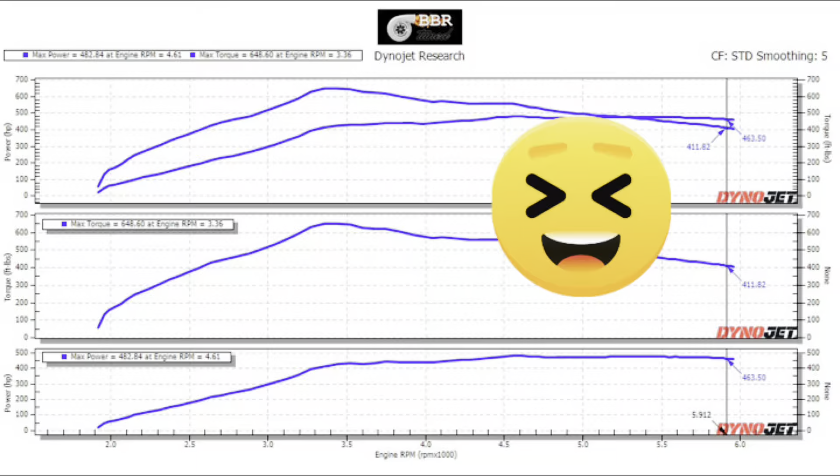Here's our test subject for today. This is my daughter's 2020 Lariat F-150 Ecoboost. Crew cab, short box, with a lovely little soft topper on it. Full weight, nothing out of it, has everything in it.

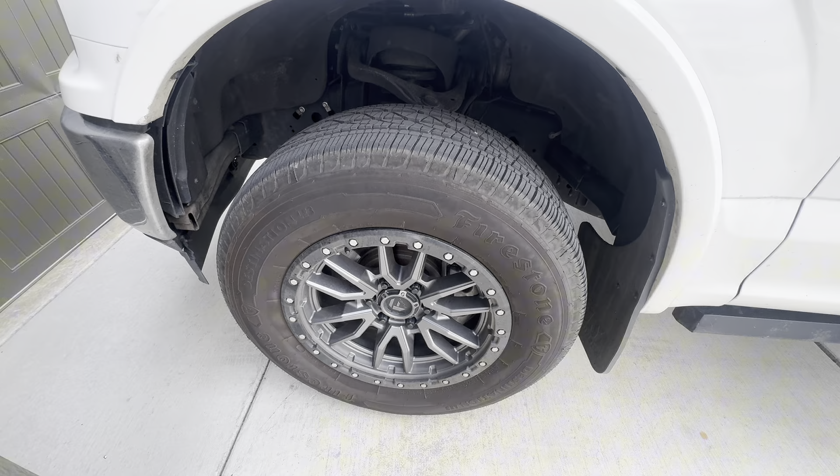It's got fuel fake bead locks with some lovely Firestone Destinations straight off of what they sent us when we bought it. So absolutely nothing done to this thing other than the fact that I have a Cobb Access Port and I have tuned this vehicle. Full weight, everything's here.

This is what we're going to do our testing off of, just to show you what we can do with the Ecoboost out here. I can do this with HP Tuners as well, but I was trying to get some stuff in on Cobb as well.

This one is done on Cobb right now because it's one of the years you can do that on. You can do it on most of the Raptor years and the 2020 and earlier. After you get to 21, if it's not a Raptor, we have to use HP Tuners instead. I do like the Cobb interface a little better for logging and doing remote tuning, but HP will work. We just have to get through some of the glitchiness of their software when you're using your phone to log stuff and send it over to me.

So we'll show you what this thing did. We'll make a couple 1/8 mile rips, both in stock form and with the 92 octane tune. We were running 92, and I'm not doing an ethanol comparison here today - I'm going to change it over to like an E40 later. You can't run full E85 in these with the stock fuel system; there are some upgrades you have to do to it. But again, the point of this was just to show you what a tune is capable of doing to these trucks, and it's pretty huge.

All right, we're going to get a little 1/8 mile hit here on the tuned version. 30... 60... 1/8 mile. There's a baseline for the 1/8.

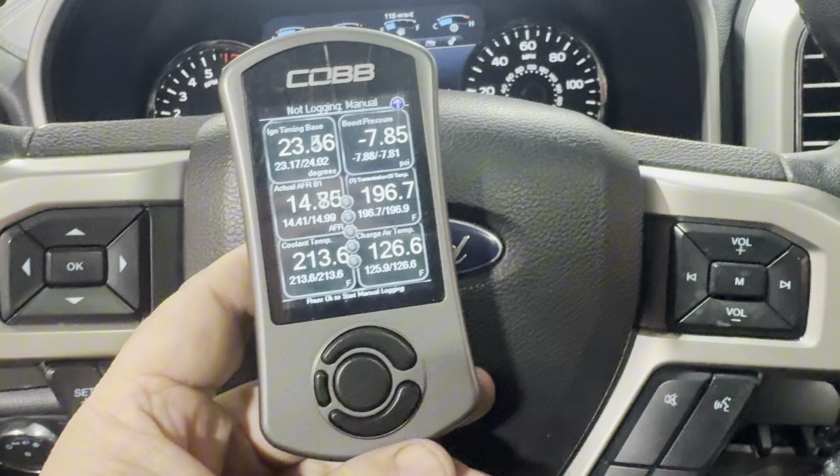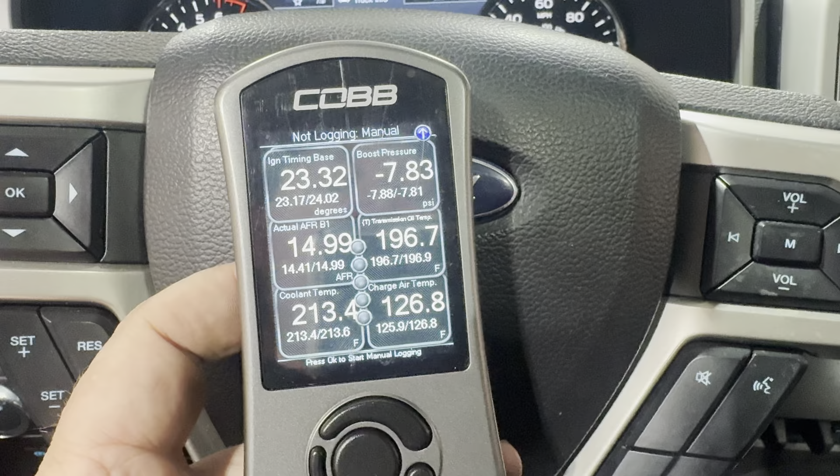All right, we have a bone stock 2020 F-150 that is my daughter's truck. It's Ecoboost 3.5. This is my tune that's on it right now. We're going to run a pull with it on the dyno and see what we make. Then we're going to run the stock tune, and we're going to run a Cobb off-the-shelf 91 octane tune. Their 91 versus 93 really is close - it's like a degree of timing, and that's about it that I can tell on the difference between the files. So the 91 should be a pretty good comparison with us having 92 only here.

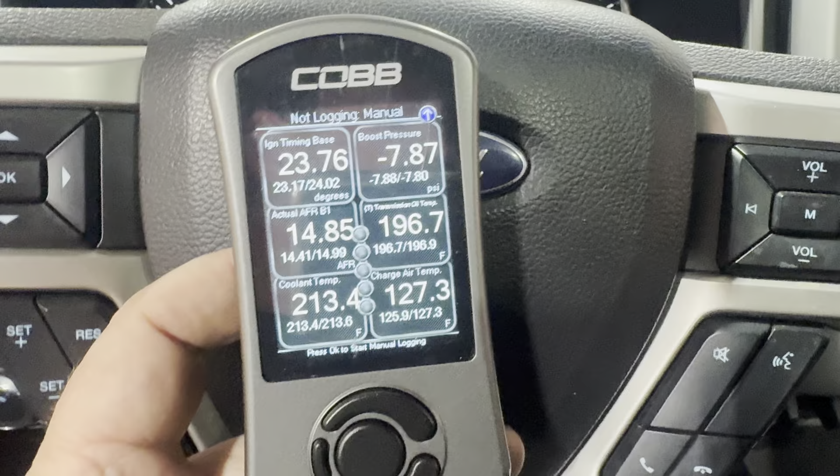So I'm going to finish getting this ready and we'll make a rip using Cobb. Again, already set the base map up - we're just going to log directly on this for right now. And then I'll go find my cord, and we're going to try to get an E40 tune on here as well and see what it does. All right, there we have my base map.

Made 420 wheel, 530, 529 foot-pounds of torque. Pretty smooth. It's got a little bit of jigger in the middle of it. It's kind of to be expected. It's a little warm right now.

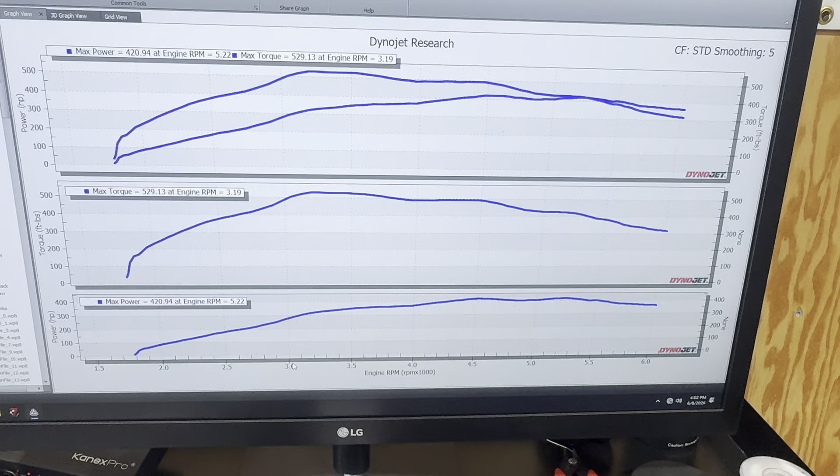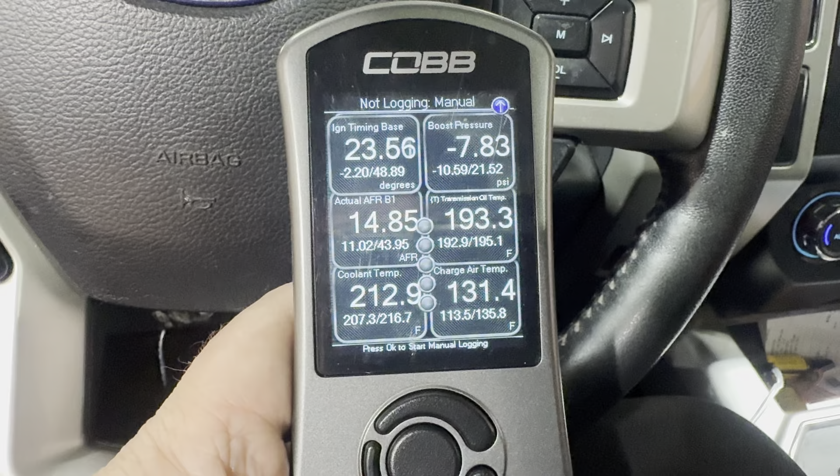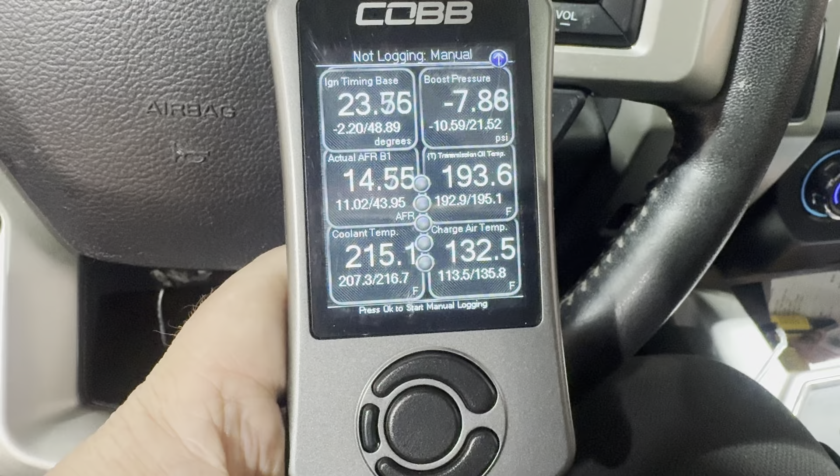So we'll go with that and see what our stock tune does, and 91 octane from Cobb. Just so you see where the numbers ended up at, we made 21.5 pounds of boost on the tune. We're going to leave it right there because that's about what it'll handle with the charge air temp being up as high as it is. You notice I still don't have an aftermarket intercooler on this. This is stock intercooler, so it does stay fairly warm, which is going to limit a lot of the stuff we can do. An intercooler is the biggest upgrade you can do on one of these trucks.

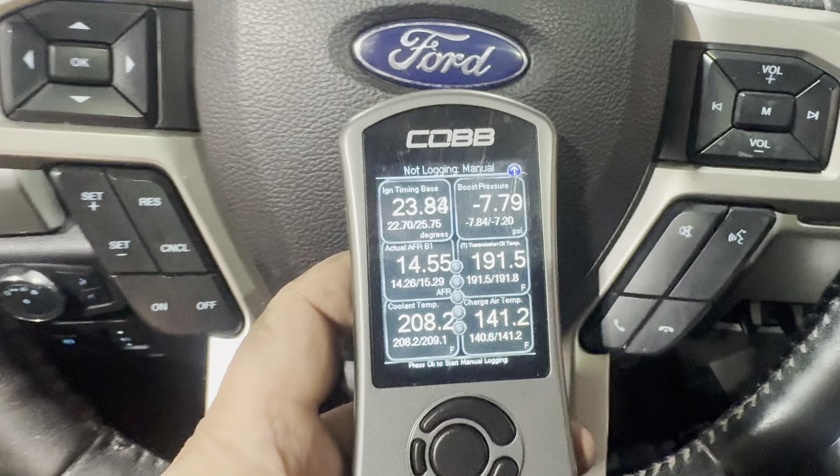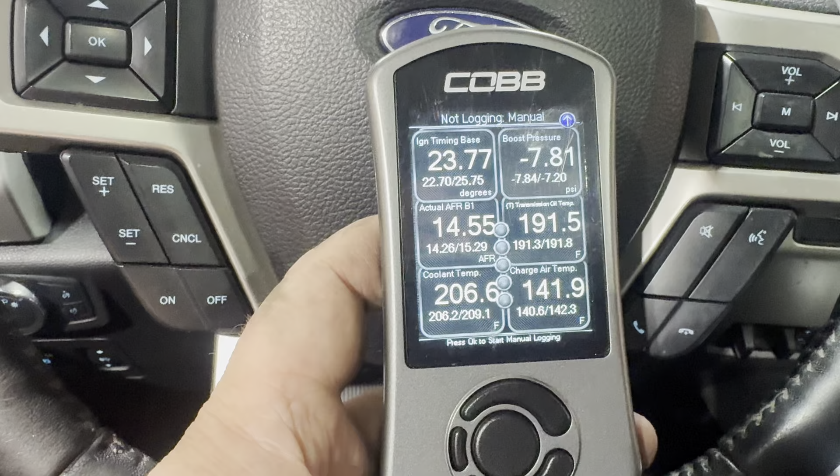All right, we got our tune baseline, trying to get this thing cooled down some. Got 2 fans up on the front now. We're rolled a little bit, see if that helps on the charge air temp. Then we'll go make a hit here with the stock tune. But right now the charge air temp's up far enough, it's going to pull the stuff no matter what. So one second, didn't realize it was going to get this warm here.

All right, we got charge air temp coming down. I think that's about where we were at on the previous one too, it was right around 130, 132. We're going to make the hit here in 5th on the stock tune. I'm not sure if it's going to pull this before the speed limiter or not, so we'll see here in 1 second.

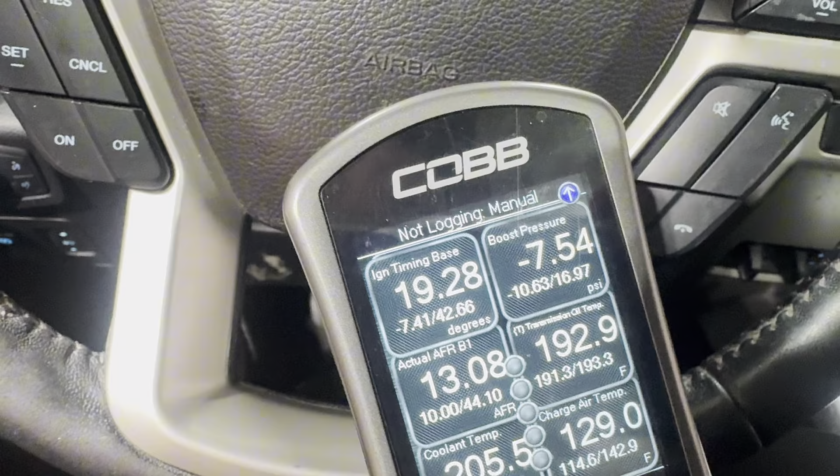As you can see, we did hit the speed limiter on the truck with the stock tune. Boost wise, we only made 17 pounds. Charge air temp was in the 120s during that pull, down to 114, so it's a little bit better. So we'll see what the numbers look like.

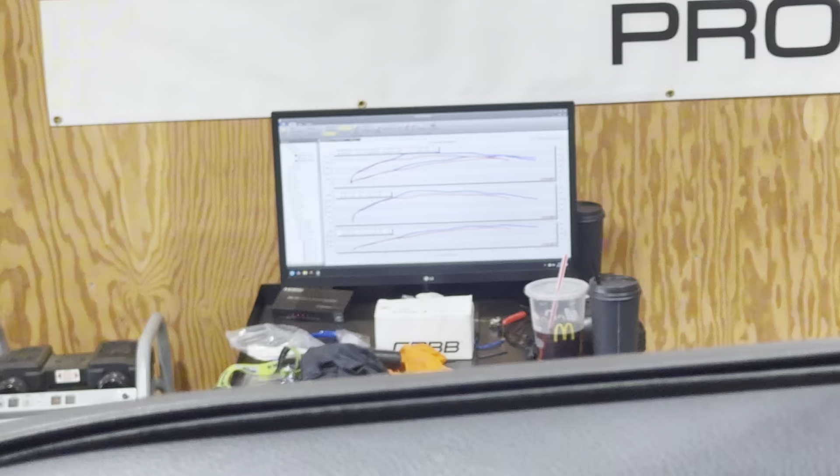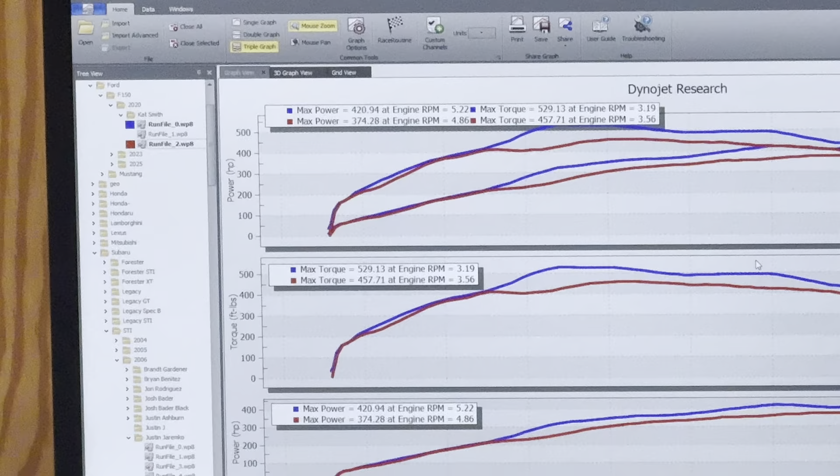You can already see we're down quite a bit. So stock looks to be 374 and 457. So we made almost 50 horsepower more. On my tune, torque was up quite a bit. So again, I think we're fighting a bit with the charge air temp, just with the setup in here. You can see...

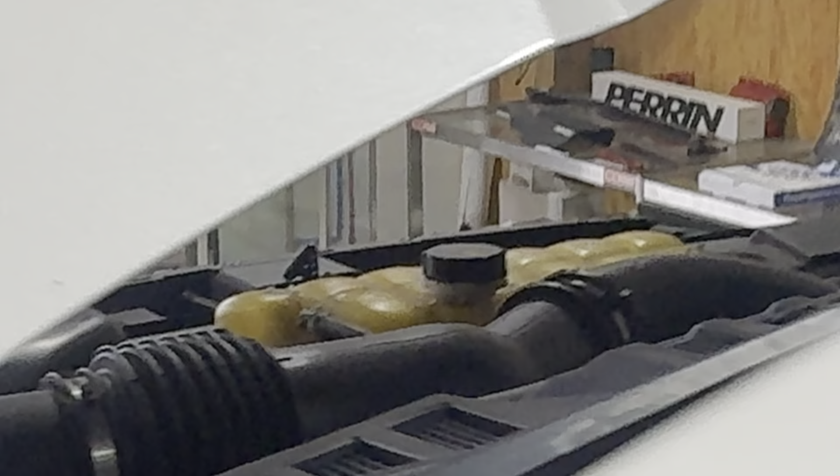It is like 80 degrees, and the stock intercooler does not like heat. So we're going to flash the 91 tune, see what the stock one from Cobb does on this, and we'll go from there.

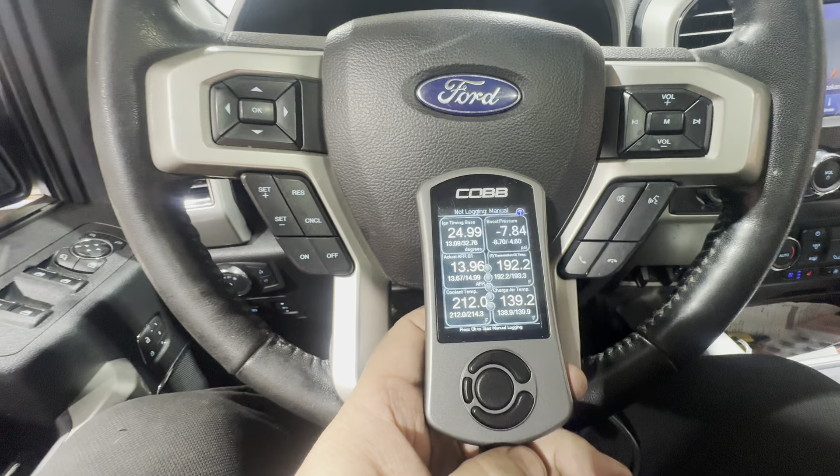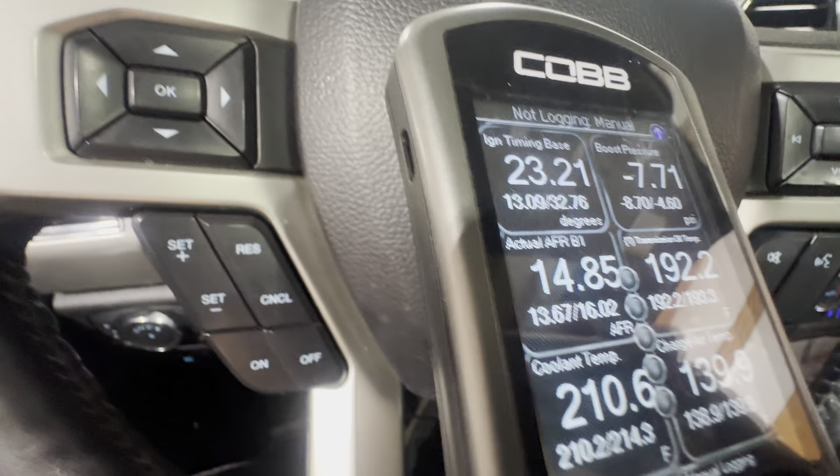All right, now we're going to do a 91 octane sport tune from Cobb and see what the numbers get. Again, our IATs are up a little bit, they cool down a bit once we start rolling. I did pull the ABS fuses to make this all work. Well, let's see what the stock one does now. Sorry, not stock, but 91 octane Cobb tune.

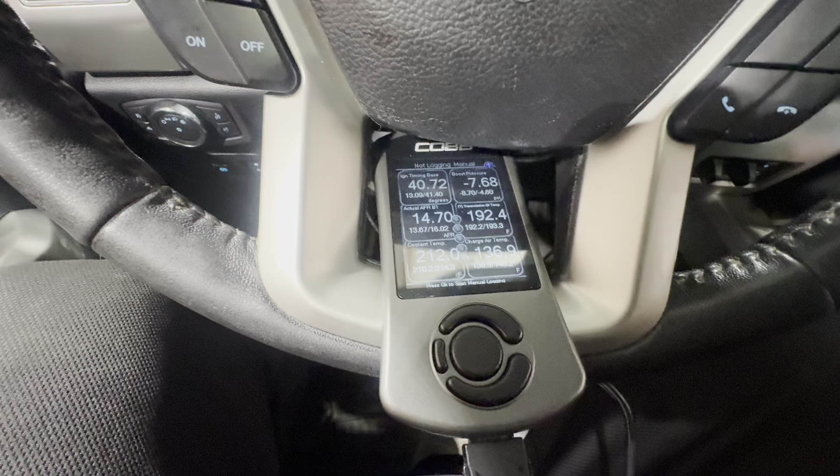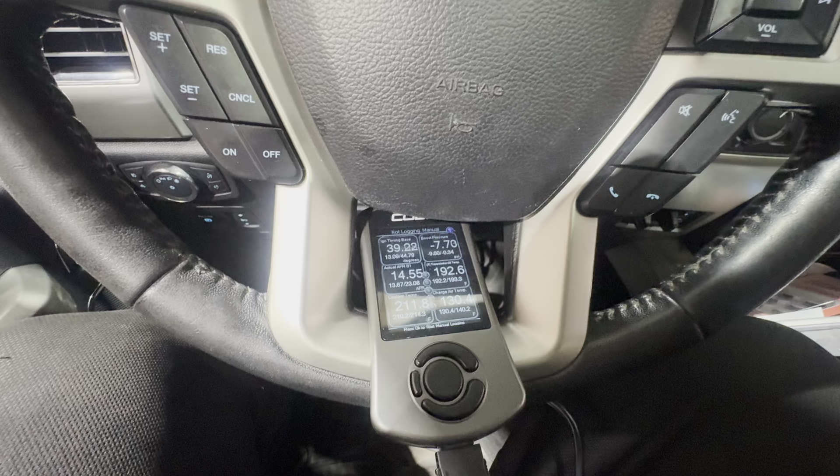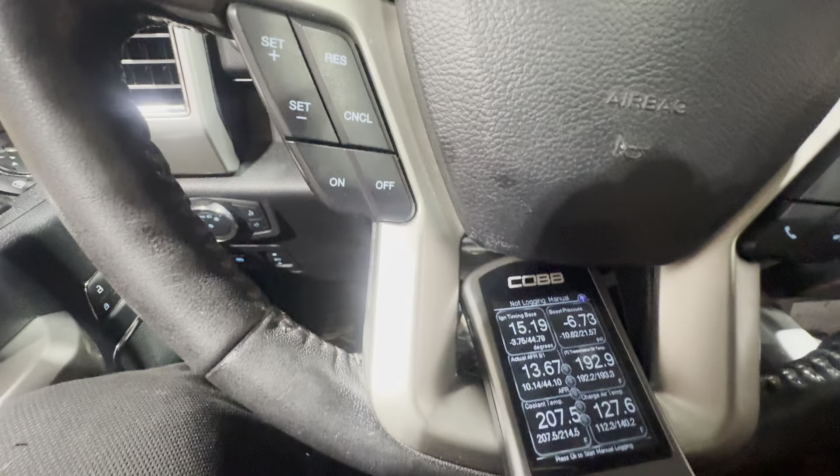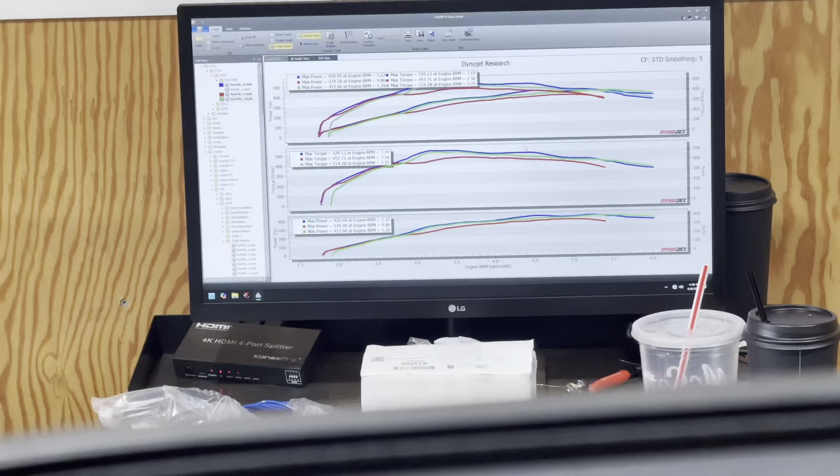And we're down to about where we were at, and everyone else starts at 2,000 RPM. So we saw 21.5 pounds of boost. Let's see what this looks like on the graph. Pretty identical to what I had, so I think I might have flashed the wrong tune. Actually, it wasn't wrong, I did put the right one on there. We are fighting a little bit of temperature stuff, but as you can see, it was at 412, 514. So my map did pick up some on here.

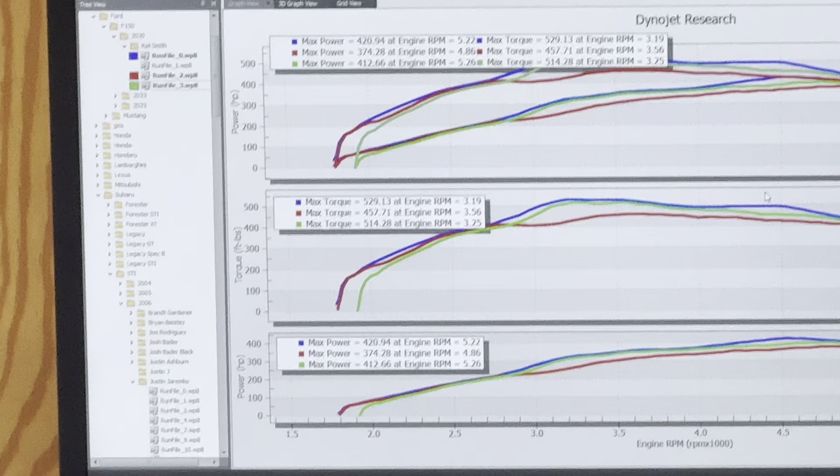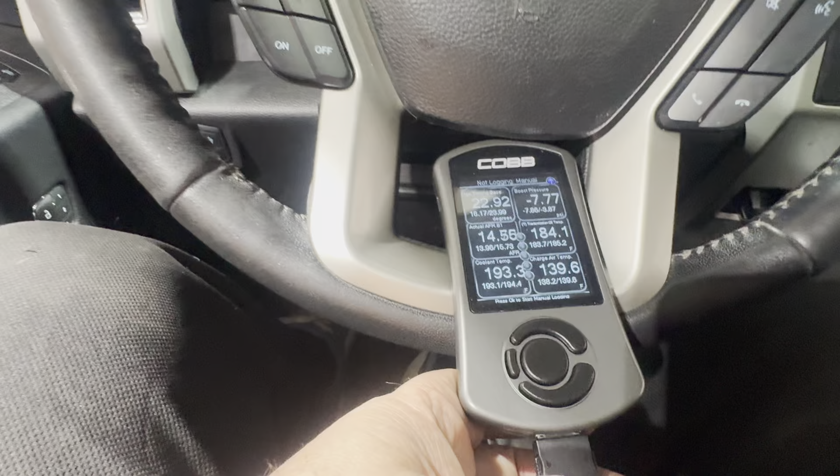We're going to try one more thing on here and see what it does, and we'll go from there. All right, made a couple of changes here. Again, just looking at this, showing you where we're at on numbers, coolant's in there good. Let's see what we get for boost pressure out of this one.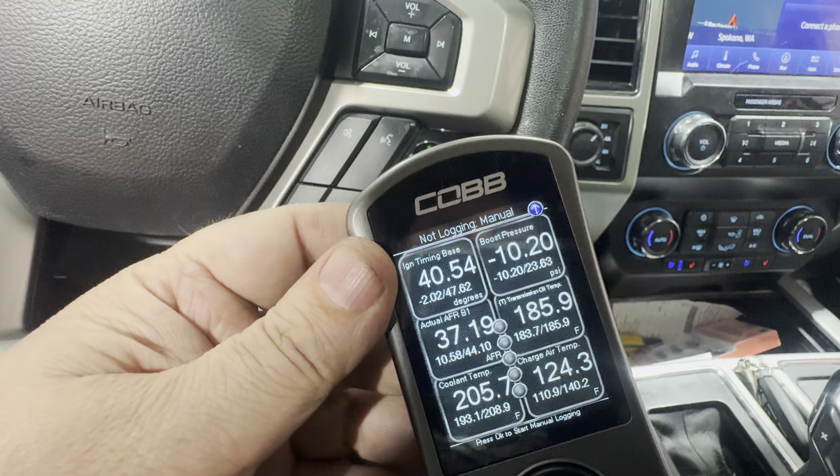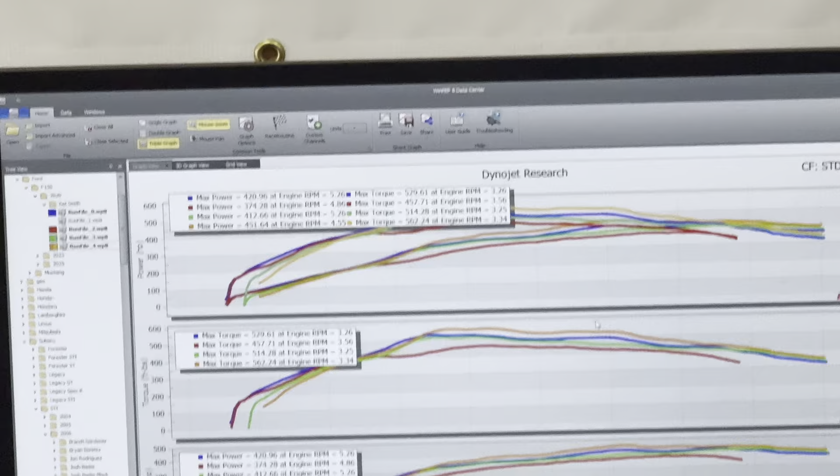There we go. I discovered I had a limit on my previous one. That brought us boost up to 23.63. And focus is there, that was a good jump. We're at 451 and 562. So that's what we can run on 92 octane here with properly tuned. So that was quite the jump. We'll check the logs that came through on that and go from there.

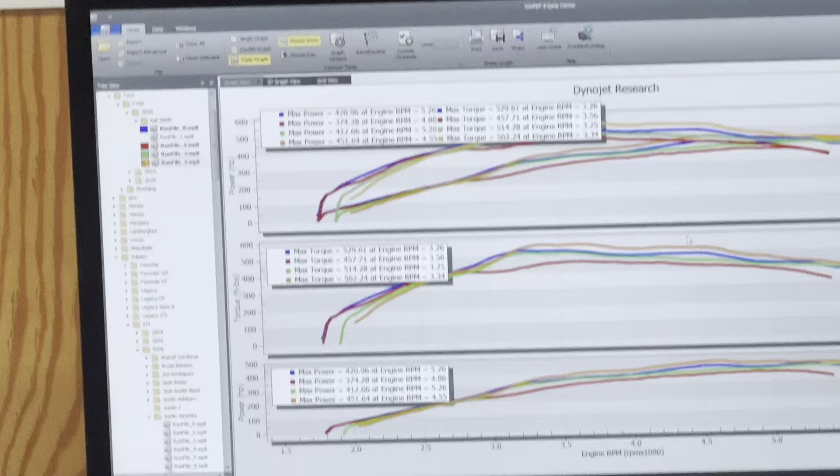All right, so hopefully you can hear me here. We got all the fans going, trying to keep everything cooled off. I discovered one of the limiters that I forgot to pull out.

So that was hitting us in the boost department. We were only making 21.5 pounds. The last hit brought it up 2 more pounds of boost to 23.5, which is the max we can run there. Timing looked pretty good across there. Had a little dip right here where I think it might have touched a little bit of the knock control up top, but nothing too significant. Kind of came across there nice and smooth.

So if I close all and just do the last one, this gives you a good aspect of what I'm able to get out of these. So this is 451 and 562, and the stock run was this file right here. So that gives you what stock versus tuned looks like. Significant increases here, right? We're 120 some odd foot-pounds of torque up, another 80 horsepower carrying through here.

All right, that's 365 versus 450. Sorry, it's kind of being weird on how it's displaying that. Sometimes Dynojet's got entertaining software. But just so you can see, stock in 5th gear, you hit the speed limiter. It's also starting to tail off pretty good past 5,200 RPM. Here we've got it carrying a lot harder. So we're up here making almost 400 wheel all the way out to 6,000 RPM now.

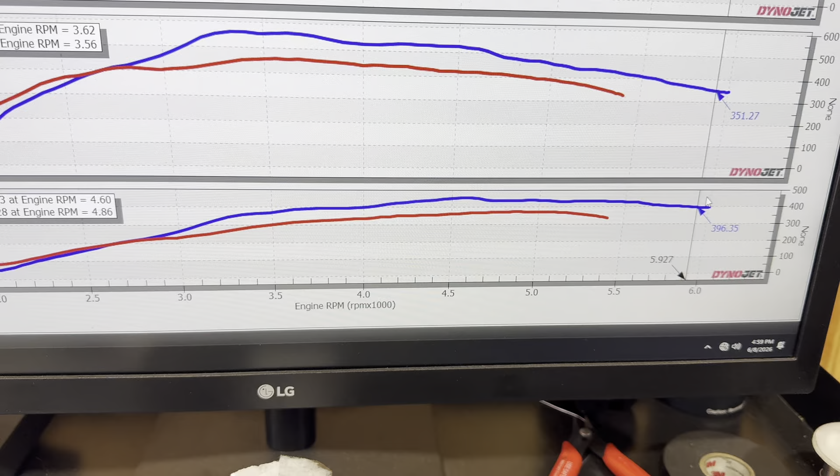Okay, so we've now mixed an E40 concoction. We're gonna run that, see what we get.

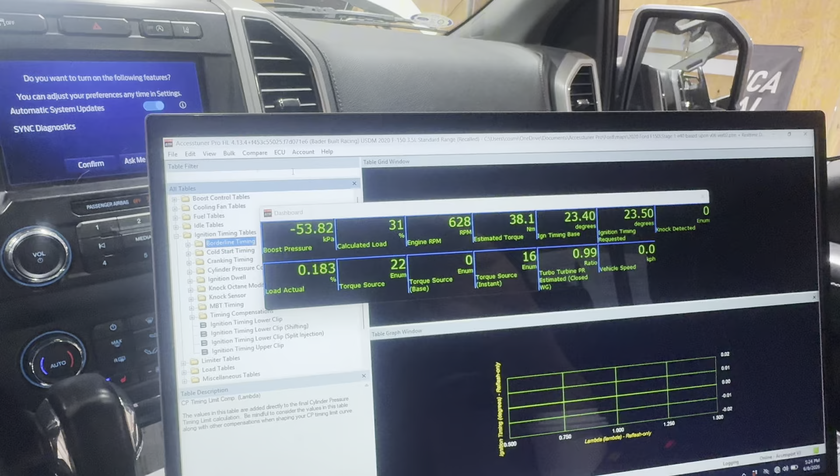All right, take 2. We got logging going on here. Sorry, I had a little problem with getting the Accessport, had to restart it real quick. We're here in our Accesstuner. We'll go ahead and make a rip now and see what this does on E40. Not enough hands to do all of this. So you can see, we got to relight the dash on because I got ABS stuff turned off, and we're rolling.

So we got it in 5th gear. Here we go, we hit the test.

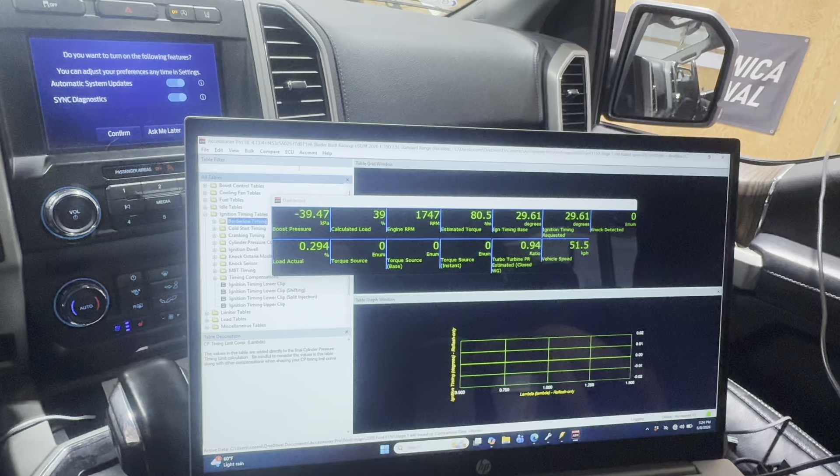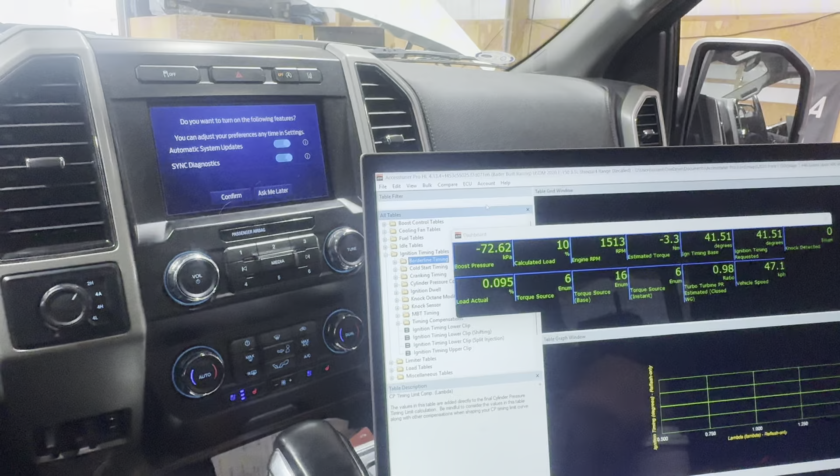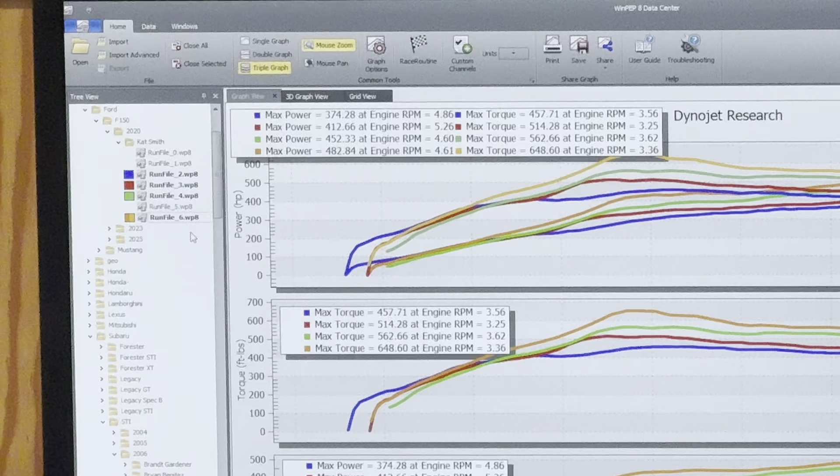That sounded pretty good, I think we got it. I'm going to stop my logging. And we'll hit the green button. That looks like we came up. We'll get a focus here in one second. Yep, there we go, 482. Big torque jump to 648. We'll take a look at it on the timing and everything else, but it definitely came up. Another 30 wheel and a whole lot of torque, which I probably should take a look to make sure we don't have any knock going on here.

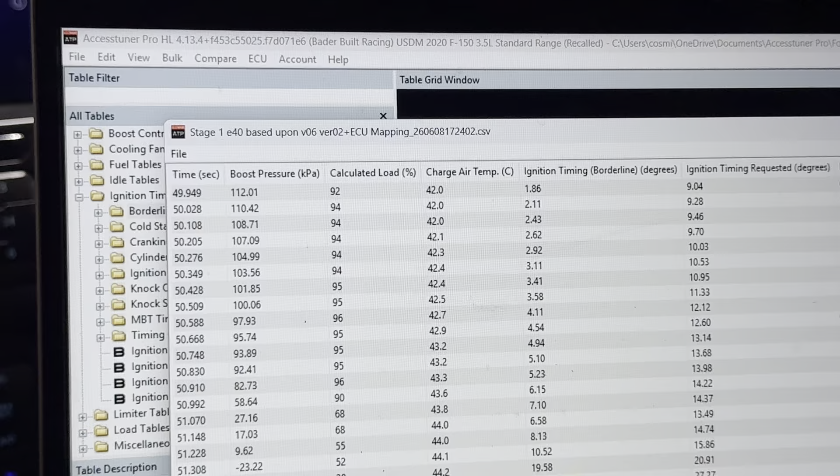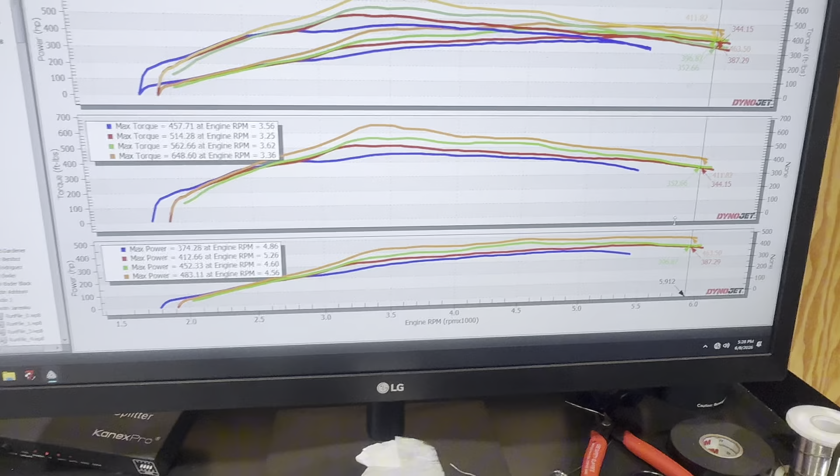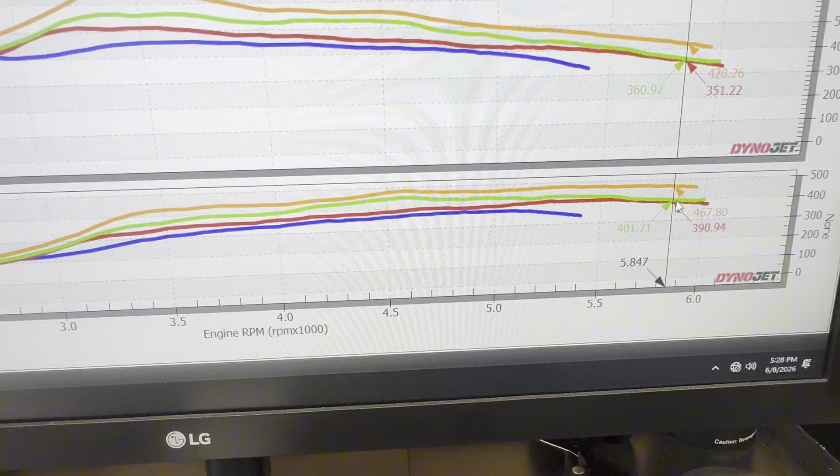We were down in the negatives, so I think we were okay, and it slowly came up. We got like 10.5 degrees out the back there, so that was pretty impressive. So that's E40. Ethanol fuel makes a huge difference. You can see here, if we focus down here on this end, I'm carrying 467 horsepower, whereas before in the green, which was my 92 octane, it was at 401. So we're carrying almost 70 wheel out the back end now. So this thing should be an absolute monster on the street.

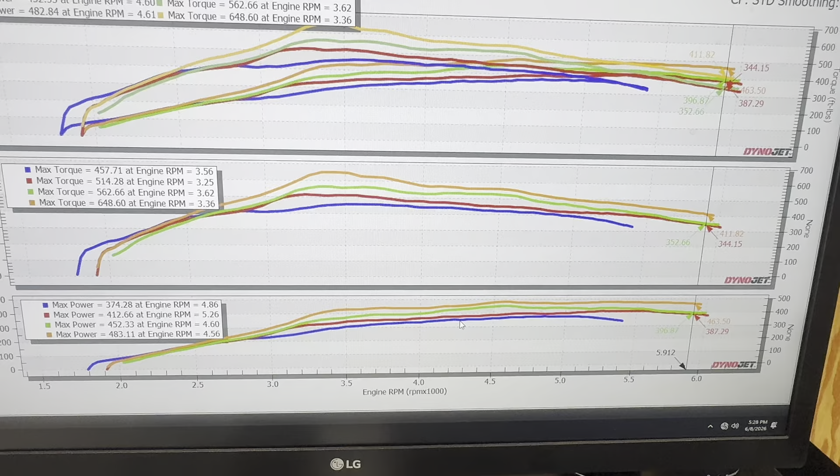I'm looking at the logs. We're not knocking, it's not having an issue with this. Knock control is not interfering. The knock sensors are working perfectly on the pump gas ones. You can see where it's been pulling it in and out on some of those. We went up to E40 and it's a huge jump in your max torque. This thing should be a ripper. We're going to go make a hit with the Dragy and see what it does.

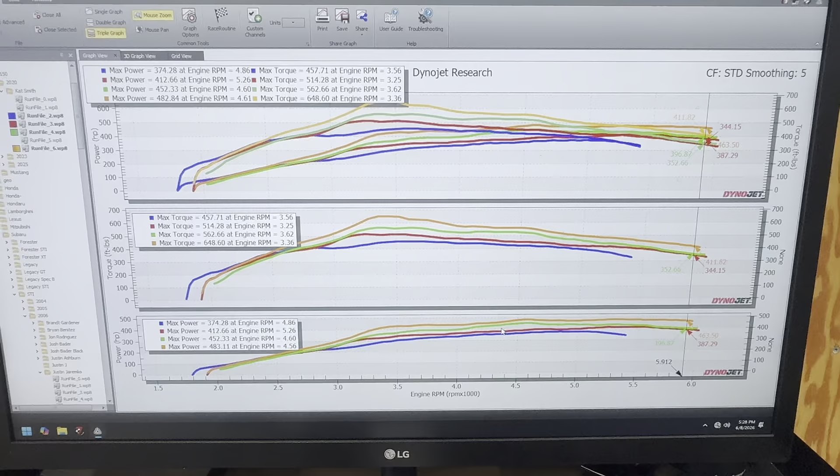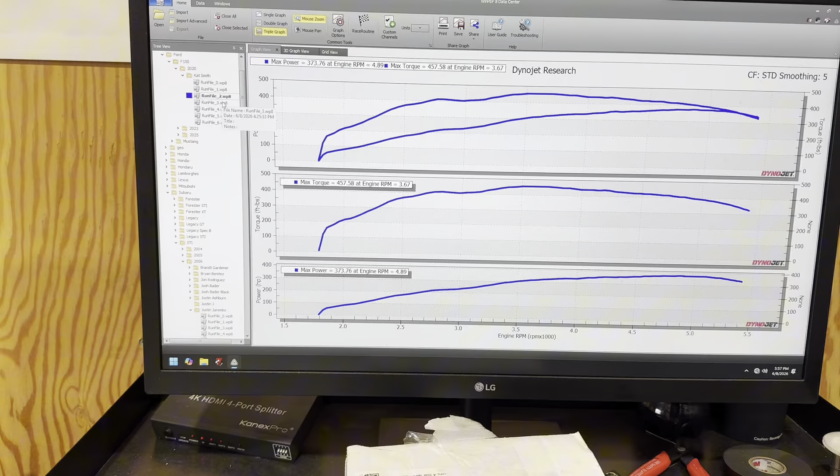All right, here we go. We're going to close this out. I'm going to show you the stock file, which is this one right here. Or no, sorry, that was a mistake file. This is stock. All right, closing this on out here. We'll go through it. Here's what we had stock. This was my first iteration tuned at 420. I discovered a limit that was in there. So I'm going to close both of these. We're going to show this the other way now. So this is stock, this is the 91 octane tune from Cobb.

Kind of that ugly little whoop there in the middle on how they set up some of their curves and graphs. This is my actual pump gas tune, which still has that whoop, but we actually carry it on out this time.

Again, I'm trying to keep the rods in the motor, so from here up to 3200, I've got some load limits in it to keep it from slinging things. And then I did my E40 tune, which took us to here, which has a huge torque jump in it.

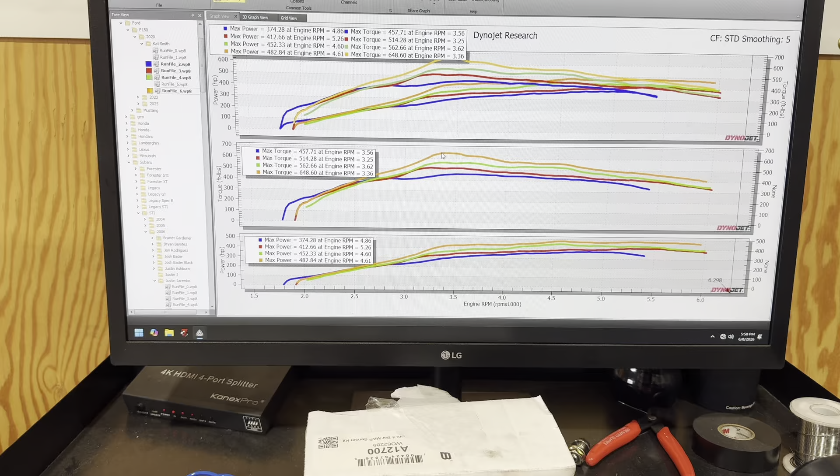Again, not seeing knock, it's happy there. I might pull a little bit of the boost out and smooth this out, just try to pull it down to like 620. I'm not sure of the safety of 648 on the longevity of the motor, but I do want you to look at the horsepower on this.

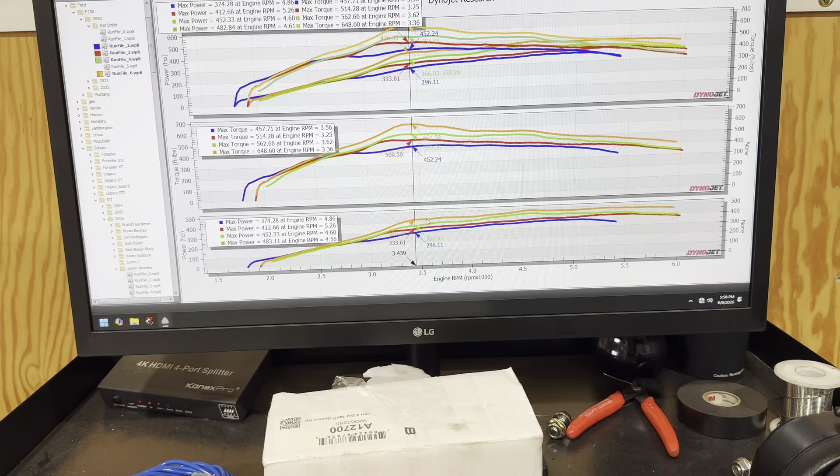The horsepower picked up all the way across the board. We're up at, if you can read that number there, 426, versus pump gas at this same level was 366. And then we had a little more on the peak when it came up. We made 483 peak to peak, which came in at 4,500. It's not showing it, but we were at 450, so it's about a 33 wheel horsepower gain.

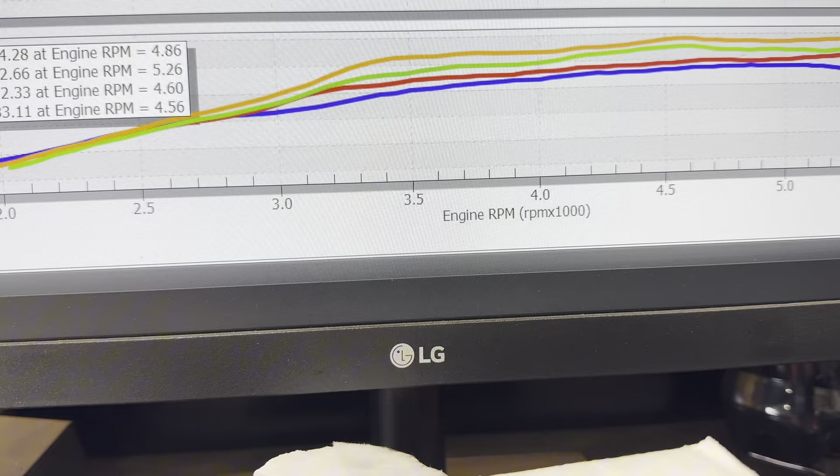But if you look at the same time up here, we're up 30 foot-pounds of torque. And then when we get out here to the end, we're carrying significantly more horsepower out through the back of this, because we're at 467 versus 400 on the nose. So we're carrying almost 70 wheel out to redline.

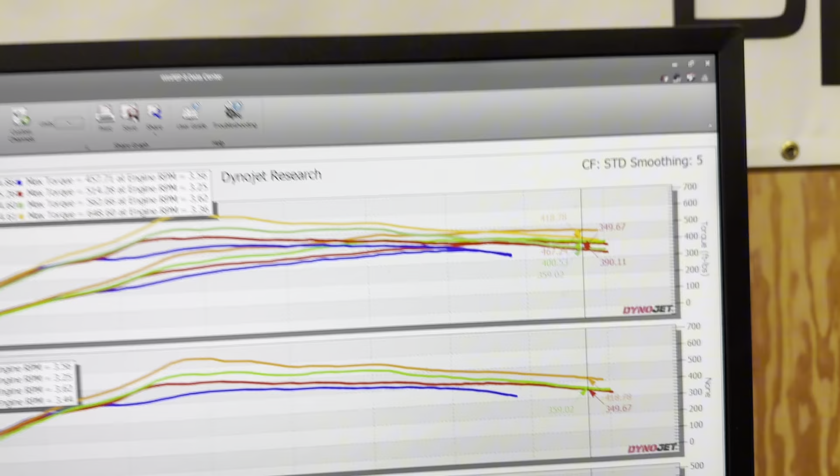That's going to be huge on the street, huge when we actually go out and race this thing a little bit. Hoping to put this thing in the 12s. I think it's hilarious that we're going to take a full-size crew cab with a soft topper and go run a 12-second quarter-mile on an E40 tune. So we'll let you know how that goes.

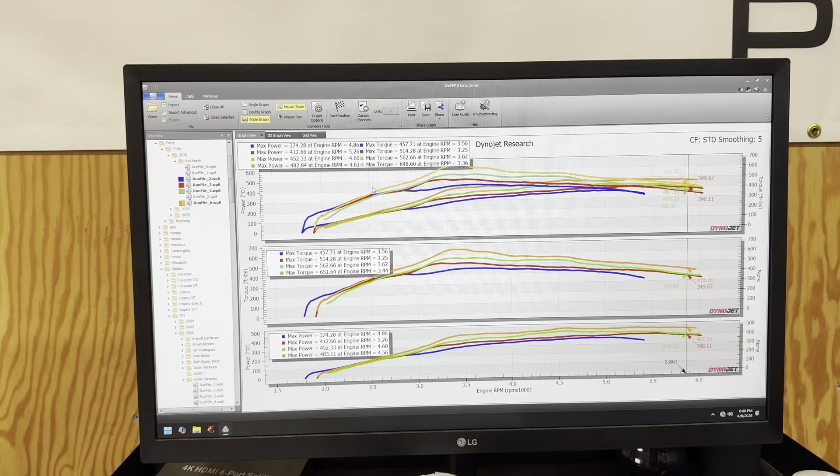If you've got any Ecoboosts that you want to get tuned, this is kind of what you can expect on a base one. I do need to put an intercooler in it. I want to put some high flow downpipes on it, that'll free up a little bit more. We can run a little more boost for longer, because it is going to get hot on these nights where it's up in the 80s where we're at right now. So we'll see how this all works out from there.

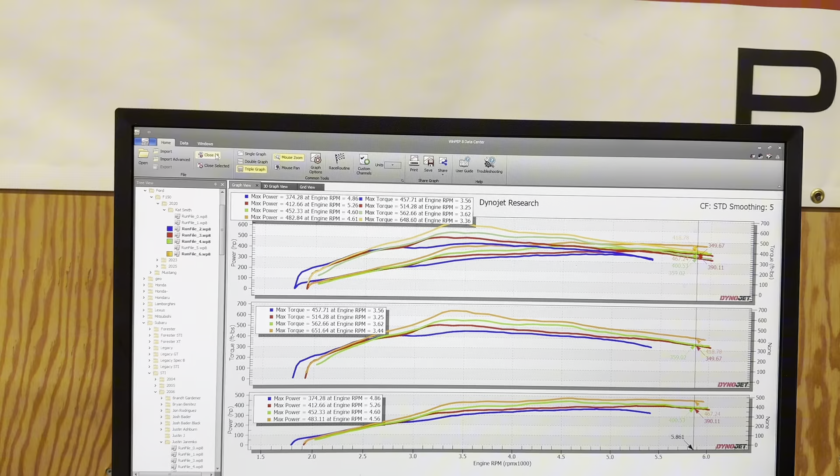All right, we'll get a rip here. Let me roll the window up or two.

All right, here we go. Ready? Stomp the brake as hard as you can. Bring it towards about 3,000 RPM and then let go and hold on. You're gonna want both hands on the wheel. More. Keep your foot hard on the brake. Let it go. Go.

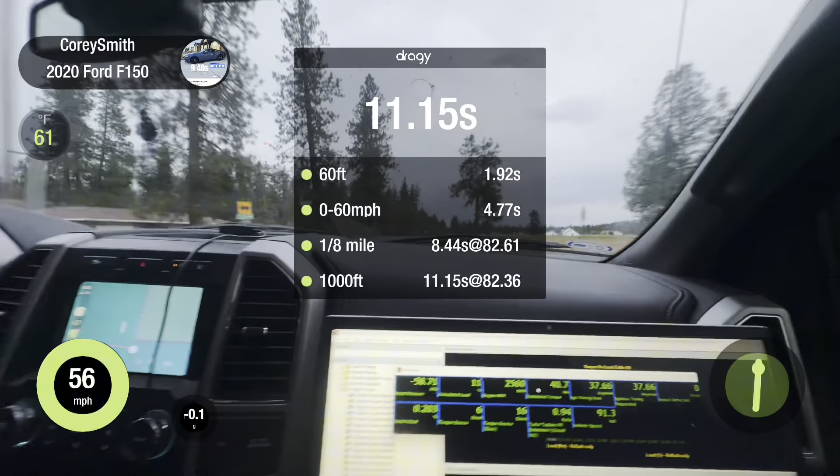30. 60. All right, slow down, I saw a car up here. Quarter mile. No, I definitely would have gone flying through the...

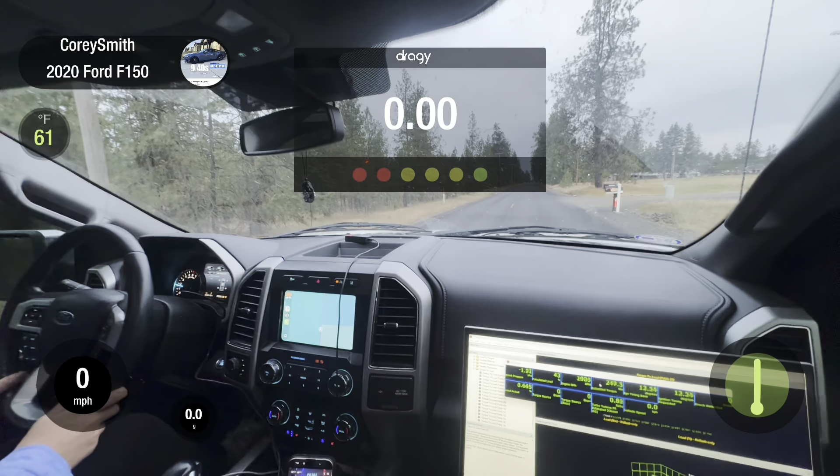Okay, press harder on the brake this time, and we're really trying to hold the thing, get it a little closer to 3,000, then just let go. But I would, again, be ready with your hands on the wheel, because it's going to go hard. More. Go. Okay, 30. 60.

Quarter mile, there we go. Okay, easy on the brake. Yeah, the brakes are a little sketchy on this thing now.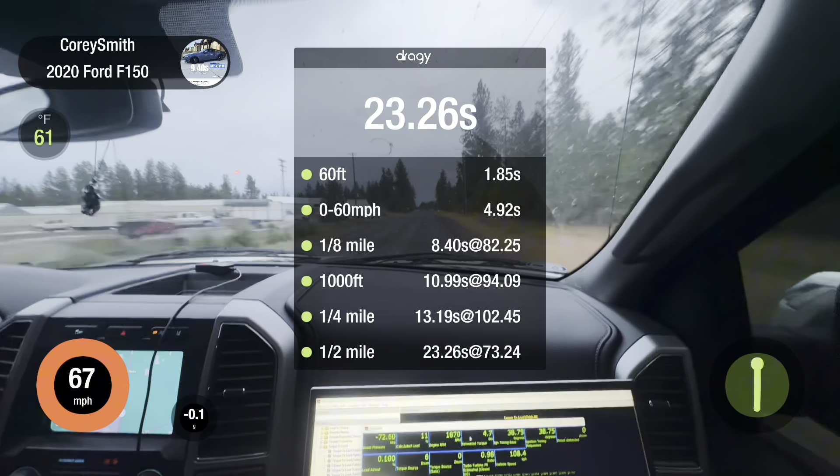Half mile. Ready? Just leave it where it is and just don't brake-boost it hard, it's not going to do no two-wheel drive. Just a little bit of gas and then just stomp it and go. It's going to spin like a motherfucker. Go. Go.